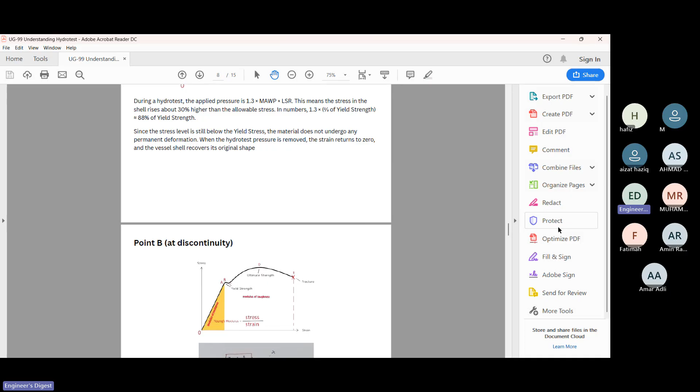Okay, hari ini tajuk kita adalah Hydrotest. Tapi sebelum kita pergi kepada Hydrotest, saya akan go through sedikit tentang apa yang kita dah pernah cover sebelum ni, konsep-konsep dalam pressure vessel ataupun ASME UG yang kita kena faham sedikit dahulu. Kita kena faham beberapa konsep ni walaupun kita dah pernah go through, tapi kita go through sekali lagi, tengok sama ada pemahaman kita dah 100% ke belum.

Satu, pemahaman tentang allowable stress. Ini kita kena betul-betul faham. Semuanya datang daripada stress strain diagram. Stress strain diagram ini adalah untuk material. Any material akan ada stress strain diagram mereka sendiri. Yang saya tunjuk ni adalah typical stress strain diagram untuk carbon steel.

Sekarang kita kena faham, apabila a certain material kita introduce stress, dia akan strain, maksudnya dia akan elongate daripada kosong pada point A. Point A ini apa? Point A adalah dia punya yield strength. Ini penting, pemahaman ini sangat penting. Sebab apa? Kalau stress yang kita apply tidak sampai kepada point A, maka kita akan tahu material ini akan go back to the original shape, dia akan kembali balik kepada kosong, therefore strain pun akan kembali kepada original strain.

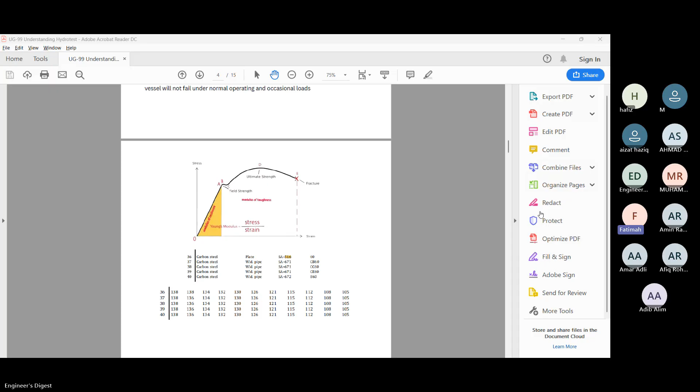Okay, semua dah masuk. Okay, sangat penting.

Tetapi kalau carbon steel material ini kita apply stress sangat tinggi, lebih daripada A, lebih daripada yield, dia akan go to the region which we call plastic deformation. When it goes to plastic deformation, kita kata dia dah permanently deformed. It means that if we remove the stress, it will not go back to the original shape. Why is this important? Today's understanding of hydrotest has something to do with applying stress beyond yield strength for the point that is at discontinuity, we'll talk about that further. But understand this: 0 to A, whatever stress below A is okay, when we remove the stress it will go back. If it goes beyond point B, it will plastically deform, it will not go back to the original shape.

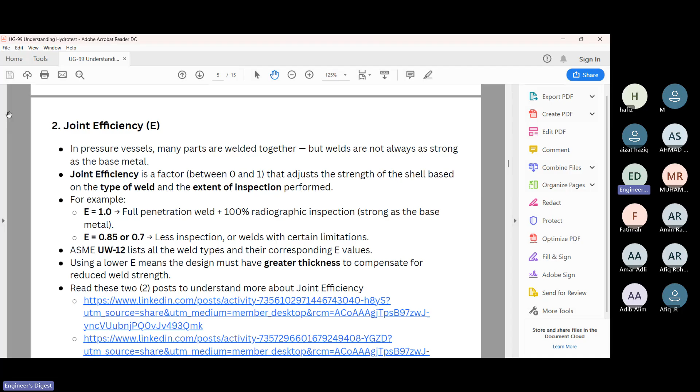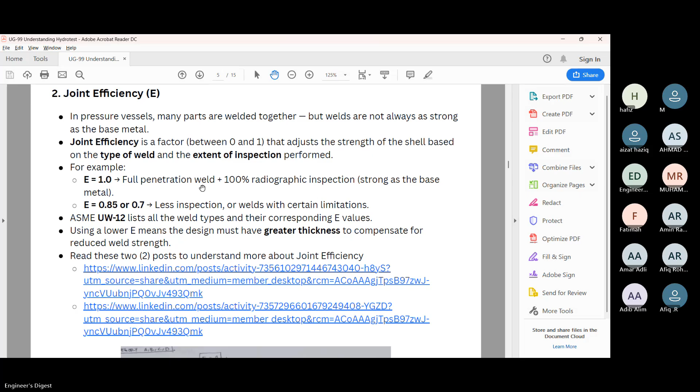Okay, so we will build upon this. Joint efficiency - this one we have covered in the last class. We can say that joint efficiency can be considered as 1. E is equal 1 when we have full penetration and 100% radiographic inspection. E is the joint efficiency. For any plate that we roll, then put a long seam, we will weld. That weldment has efficiency - we can say efficiency is 100% if it's full penetration and 100% radiographic inspection.

If you look at this figure, there are only 3 types. You can consider E equals 1 for these. Other than this three type of weldment, we cannot consider E equal 1. This one is both side groove weld joint, full penetration, considered full penetration. This also considered full penetration, although this is one side, and we put a backing strip, but the backing strip must be temporary. If it's not temporary, we cannot consider E equals to 1. The other one is one side also, but we put a root with TIG welding. Only in these three cases will we have E equal 1, other than this, E is not 1.

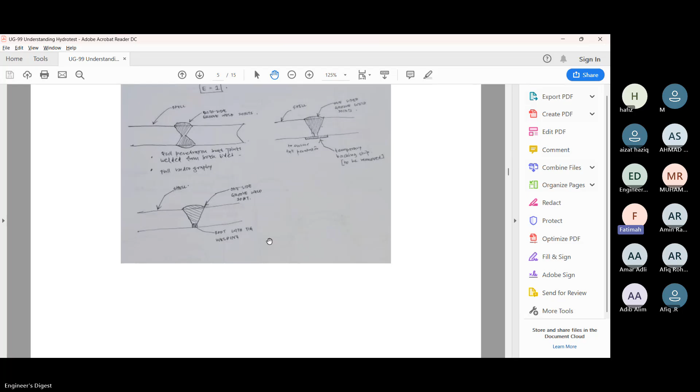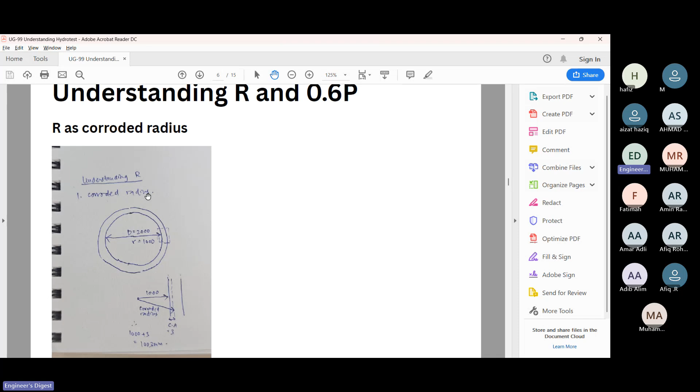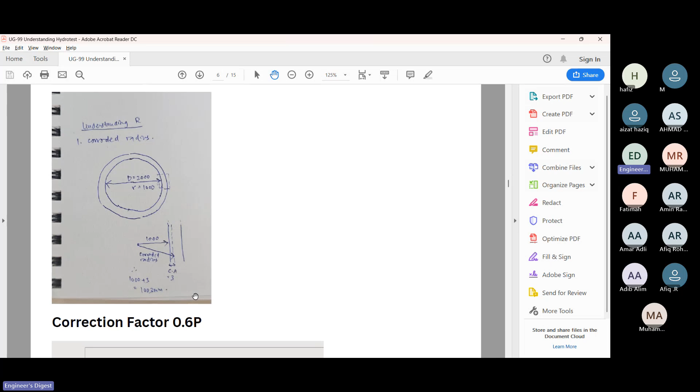Okay, understand this also. When we calculate shell thickness calculation using UG-27, later we'll see at the calculation, understand that R in the calculation always refers to corroded condition. It means that this is your shell. D is 2000, R is 1000, but corroded condition for R is not 1000. Look at this one, it needs to consider the corrosion allowance. Because up until here, it is considering corrosion allowance, so at corroded condition you need to add the corrosion allowance of 3 mm. Therefore your R is always 1003 mm after considering the corrosion allowance. This is at corroded condition.

Okay, understanding the correction factor 0.6P. In our calculation there is this 0.6P. What is this 0.6P? 0.6P is the correction factor. ASME has provided this correction factor 0.6P. Why do we have 0.6P? Because if we use the normal equation, the equation that we studied in university, right, which is equation number 1...

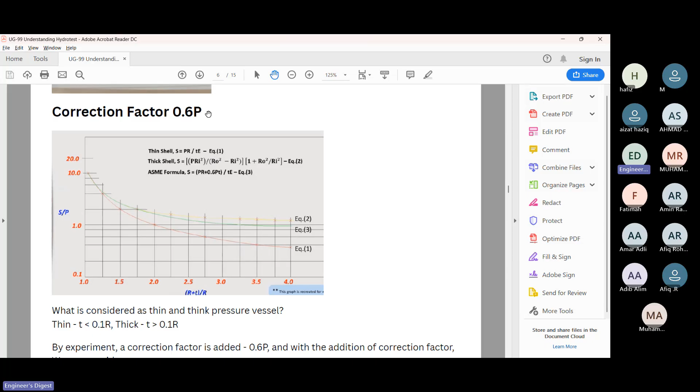Between equation 1 and equation 2, once we add this correction factor 0.6p by ASME, the deviation between equation 3 and 2, or for the thicker vessel, becomes very small. That's why ASME adds 0.6p. So when you open the ASME UG code, you will always see this 0.6p. Understand that this is from experiment, and this is a correction factor. That's why you have this 0.6p.

Now, moving on to our main topic today, we want to understand what is the reason of doing hydrotest. The typical reason of doing hydrotest is to check for leaks. When we apply the pressure, we want to see there is no leak at the weldment or at the flange joint. This is typically what we want to see, no leaking.

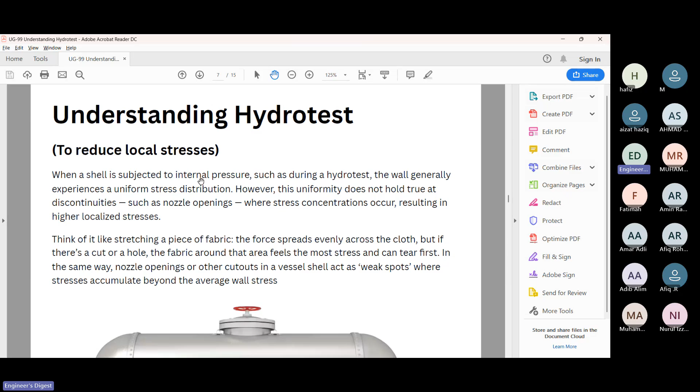But the real reason we do hydrotest is we want to reduce the local stress. And this is mainly discussed in Division 2, not mainly discussed in Division 1. So Division 2 explains the real reason why we do hydrotest, which is today what we want to understand.

So you see this is the typical pressure vessel, horizontal with the saddle. This is your shell, and your shell has thickness based on calculation. But you can see there is a nozzle here, and there is an opening here, and this opening, when there is an opening, you have what you call a discontinuity. Without this, it would be continuous. But with the opening, you have discontinuity.

And discontinuity, you have a higher stress. This stress is uniform. Stress along this line is uniform. But if we have a discontinuity, we have a higher stress here.

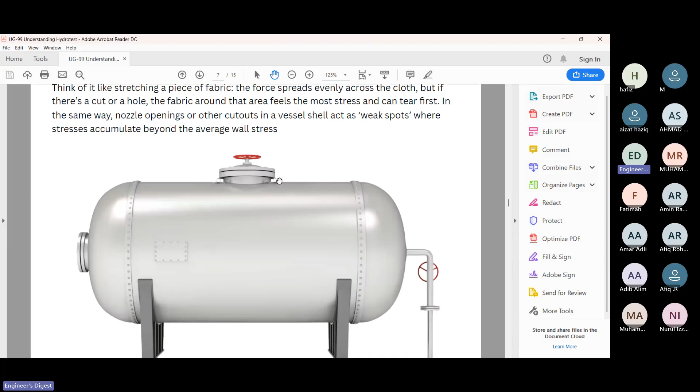So it's the same concept here. There's a discontinuity here, and there is a higher stress here, higher concentration of stress here. So the reason you want to do hydrotest is you want to reduce this local stress here at the discontinuity, at the nozzle or any other part of discontinuity. So far okay? So far can you understand?

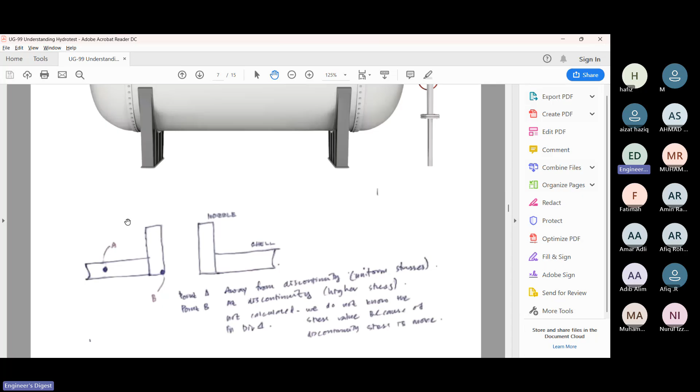This is the nozzle part, for example the nozzle part. You have point A, you have point B. Point A being here, away from the discontinuity. Point B is exactly at the discontinuity. So point B is having a higher stress. Point A is having a uniform stress. B is higher stress.

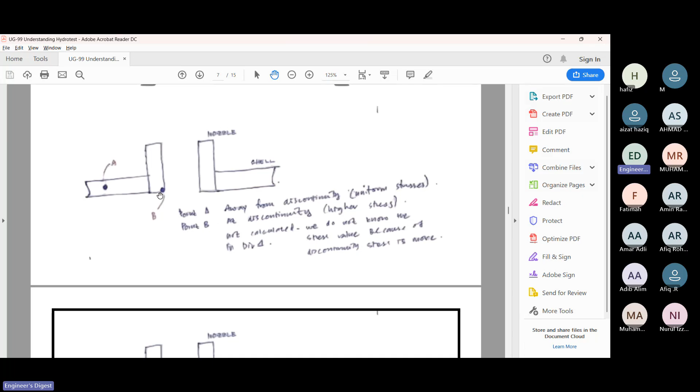At discontinuity, we have a very high stress here. So imagine point A. Point A, when we apply hydrotest pressure, internal hydrotest pressure, it will go to 1.3 of MAWP. Then when you remove the pressure, it will go back to 0.

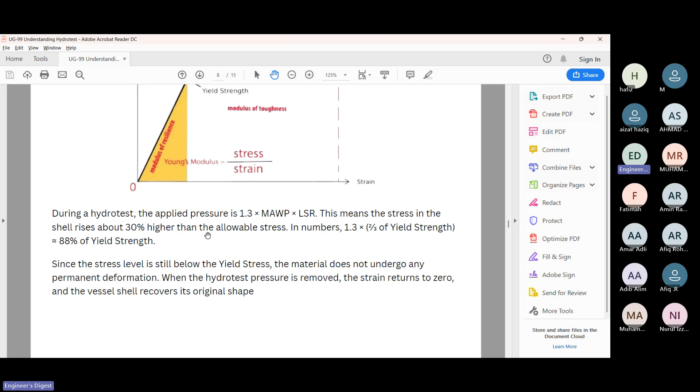This is the formula. We'll go a bit into detail on this formula later. Now imagine at point B. This is understandable. During a hydrotest, the applied pressure is 1.3 times MAWP times LSR. I will explain what is MAWP and also what is LSR. This means the stress in the shell rises about 30% higher than allowable stress.

Basically, 1.3 is above the allowable stress, and this is around 88% of the yield strength. Yield strength is here at point A. It will be around here. Because it does not go beyond A, it's not at B. When we remove the stress, it will go back to the original shape.

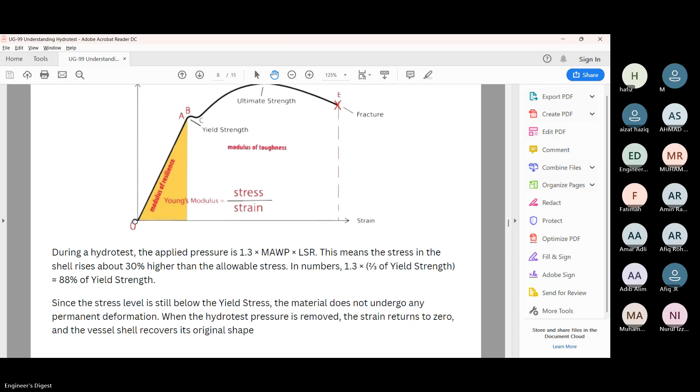But different story at point B. Point B, to begin with, you already have a very high stress because this is discontinuity. So when you apply 1.3 times MAWP, you will go beyond A, because originally you're not at 0 also. Originally you are somewhere here because of the higher stress. So when you apply hydrotest pressure, you will go beyond A, you will go to B, and this point B will be permanently deformed.

Then when you remove the stress, remove the hydrotest pressure, it will not follow this path. It will follow a new path here, and at zero strain, you will have a compressive point here. So always point B will be having a residual compressive stress.

So we can ask, if it's permanently deformed, can we see that it is permanently deformed after the hydrotest? It is not permanently deformed after hydrotest because this point is very small. Point B is very small, and the other points, which are not having this higher stress to begin with, not at discontinuity, will push this point B back to its original shape. So point B will go to the original shape, but it's having a compressive point here at minus.

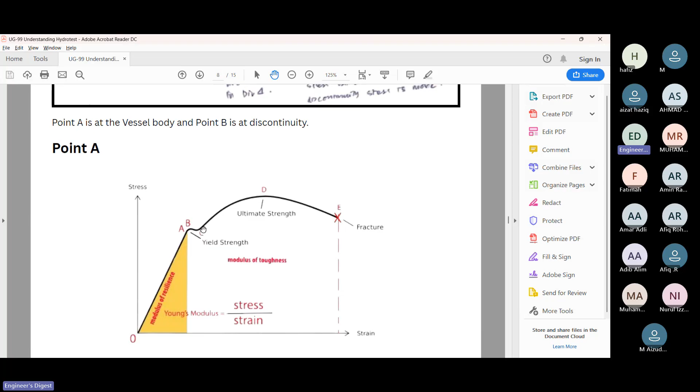Okay, so how do we reduce this point B stress? We apply hydrotest pressure. It will go higher than A, and it will plastically deform. When we remove the stress, it will follow a different path, not 0 to A. It will follow Q to S1.

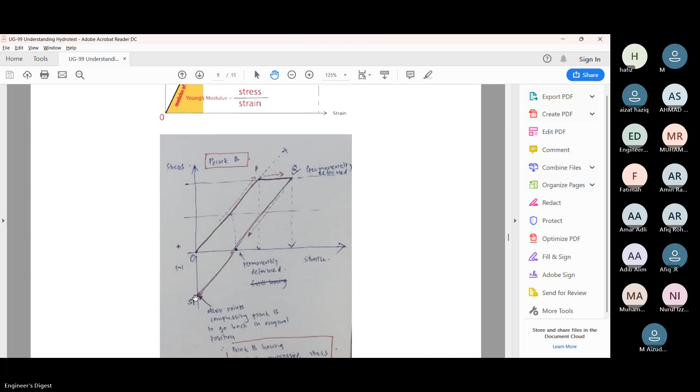This is the new path for point B. So later, if there is stress inside the vessel, it will not start from higher stress because we have tamed the point B, we have tamed it by hydrotest. Now it will start from S1, going up, then going down. This is the new line for point B.

So this is actually the reason for hydrotest, beside having to check the leak. You need to remember hydrotest is the answer to reduce local stress. Where is local stress? Not here, local stress is here at B. What is B? B is at discontinuity.

Why do we have an issue with B? B is having higher stress to begin with. We haven't started anything, but it's already higher stress here because this is discontinuity. This word is very important, discontinuity. Discontinuity means higher stress. So how do we tame this higher stress?

We do hydrotest, that's how we tame point B. When we do hydrotest, it will permanently deform. When we remove it, it will go to a different line, not 0 to A, it will go from Q to S1, and it is having a negative compressing stress. So later, when we have higher pressure inside the vessel, it will start from S1, go up and go down. This is the new path for it, not from here, because if it's from here, it will not start from 0, it will start from something here, because higher stress is already there.

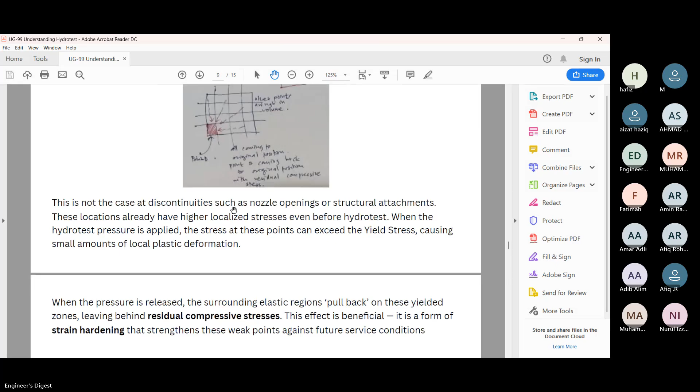Okay? Boleh faham? Faham. Okay Chun, this is the reason for hydrotest. Alright, try to understand, okay.

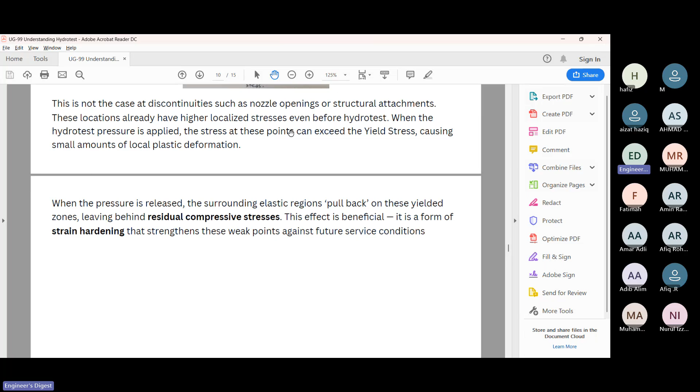When the hydrotest pressure is applied, the stress at this point, point B, can exceed the yield stress, causing a small amount of local plastic deformation. When the pressure is released, the surrounding elastic region, say all this is point A, will pull back on this yielded zone, leaving behind a residual compressive stress at point B.

This effect is beneficial, it is a form of strain hardening, that strengthens this weak point against future service conditions. So point B now is strain hardened, we have strain hardened point B. This is the whole reason for hydrotest, the main reason.

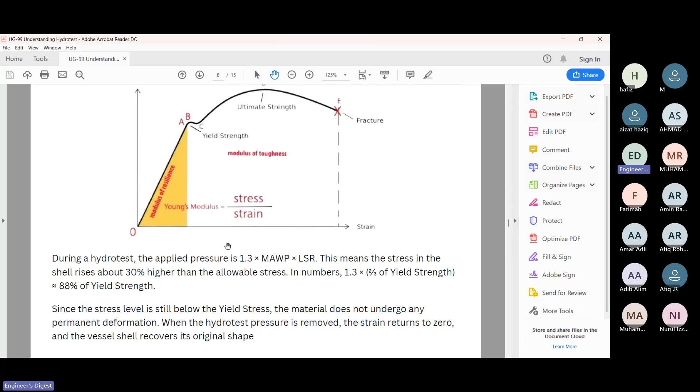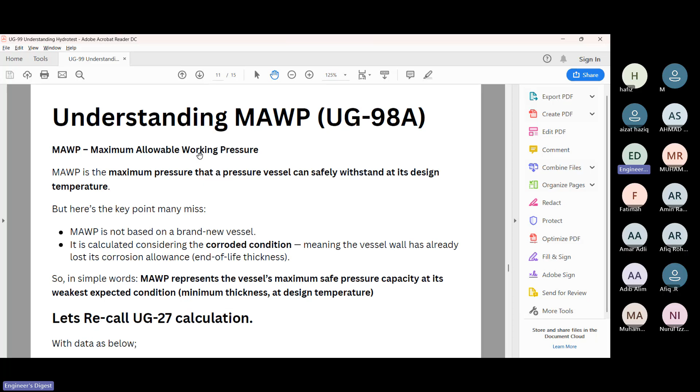Now we want to understand MAWP UG-98A. What is MAWP? Maximum allowable working pressure. The secret to understanding MAWP is actually at the W, working. In operation, you need to consider 2 things: one is corroded condition, that's why when we calculate we always think of corroded condition, and also we always think of static pressure. Then we will go further.

In simple words, MAWP represents the vessel's maximum safe pressure capacity at its weakest expected condition, meaning end of life thickness. That means we do not take into consideration the corrosion allowance.

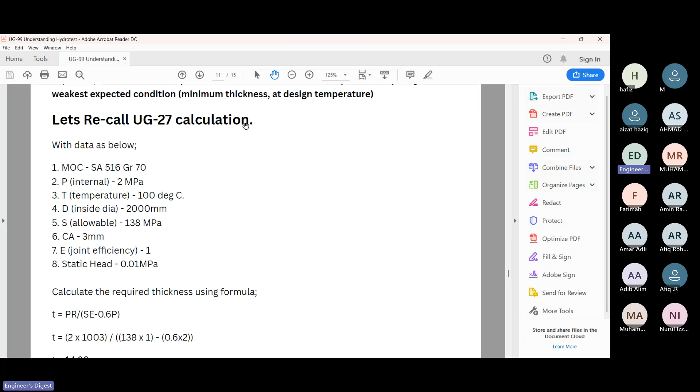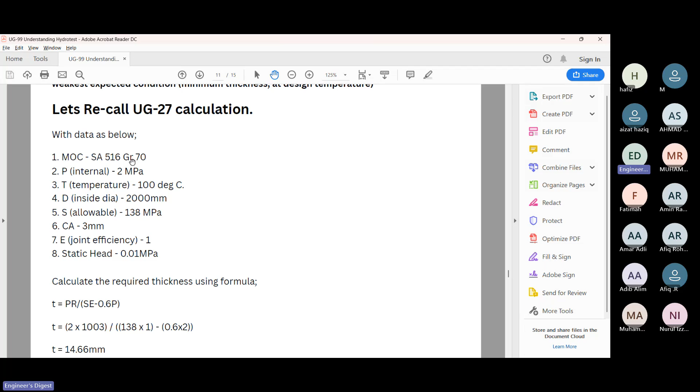Alright, try to do this. If you have a pen and pencil, try to do this. We want to try again the UG-27 calculation. This is your data: SA-516 grade 70. Understand that 516 is carbon steel plate, and 70 means 70,000 psi ultimate strength for this plate. You have internal pressure of 2 megapascal, temperature 100, inside diameter 2000.

Understand this: when you have an inside diameter of 2000, your radius is 1000, right? But 1000 is not the corroded radius, so later in the calculation you need to take into consideration the corroded condition. S is allowable stress, which is 138 MPa. Okay, let's go here.

Item number 5, what is allowable stress? Go back to here, 0 to A. A is the point when you have yield strength. Beyond A, you have a plastic region. Up until A is elastic, go beyond A to B, this is plastic.

So you cannot have stress in normal condition at A, you don't want to apply stress at A, so you want to apply stress below A. What is below A? Below A is 2/3 times this yield strength. This is 1/3, this is 2/3, this is 3/3. So 2/3 is somewhere here, okay, this is your allowable stress.

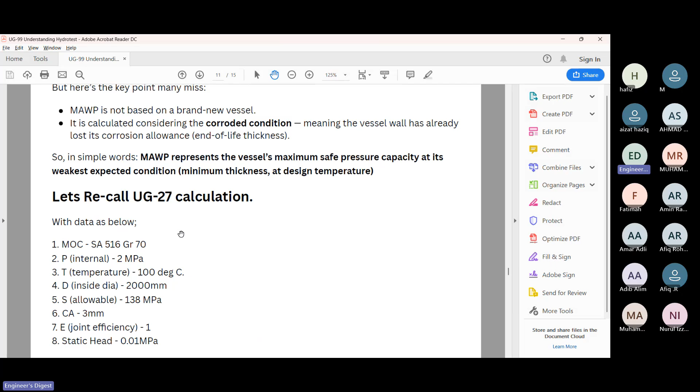So the point here is 138 MPa. That's why we put here as allowable, this one, allowable.

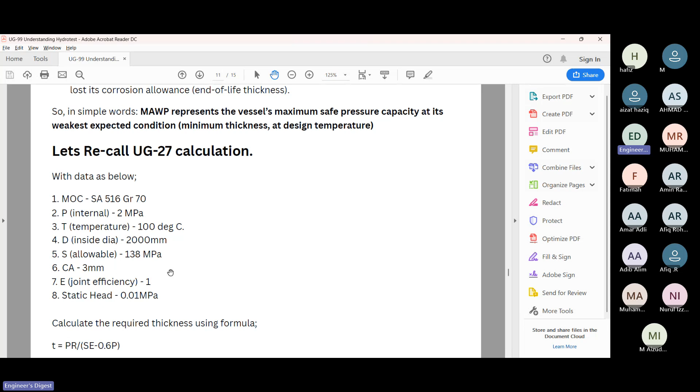Numbers. Okay, that's why we have an allowable 138 MPa. Why do we put here CA as 3 mm? For you to understand that in calculation, you need to put the corroded condition for the radius. That's why you will see that this R is taken as 1003.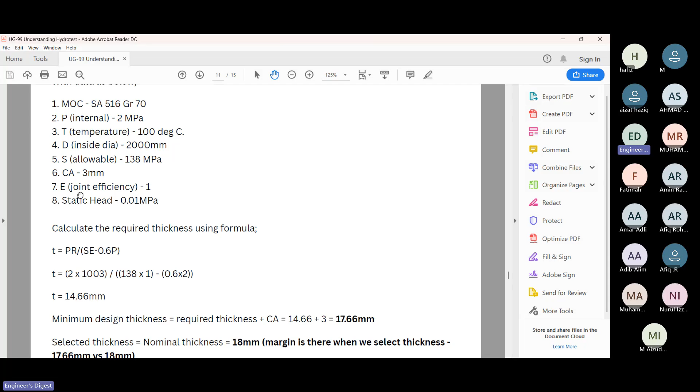Okay, corroded condition. Okay, E is the joint efficiency equals to 1. What does it mean by 1? That's why we try to explain this one.

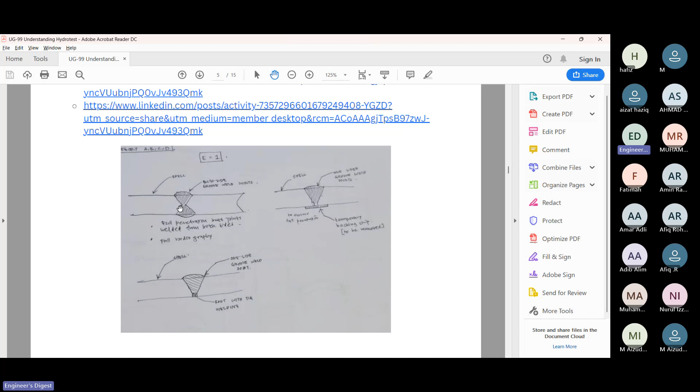Kenapa kita kata 1? So understand, when we say E is 1, it's either one of these three conditions for weld joint only. Both side groove weld, full penetration, or if one side with a temporary backing strip to be removed afterwards,

or one side with a root using TIG welding. This is what you mean by E equals to 1. Other than these three, E is not 1. E is something else, 0.85, something else.

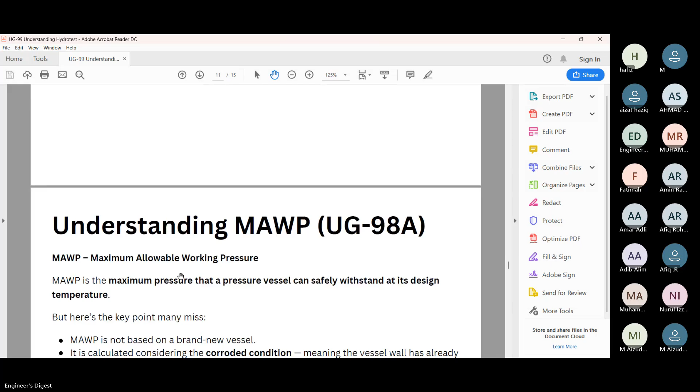Okay, so now we calculate. You try to calculate this if you can. Try to follow along. This note is given to you, so you can print it and put your own notes here. Okay, so T is PR over SE minus 0.6P.

Where do we get this calculation? We get this calculation from UG-27. Earlier this month we have gone through this UG-27. So P is 2, 2 MPa.

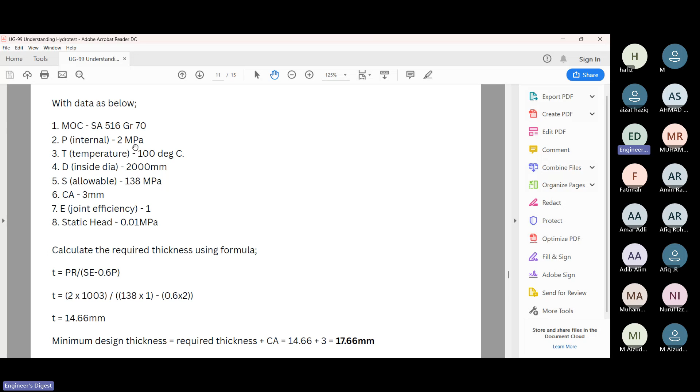Our calculation is using megapascal and mm. This is your unit, megapascal and mm. So it's 2 times 1003 over 138 allowable, times E is 1, minus 0.6 is the correction factor times 2. So you will get T equals 14.66 mm. This is your required thickness.

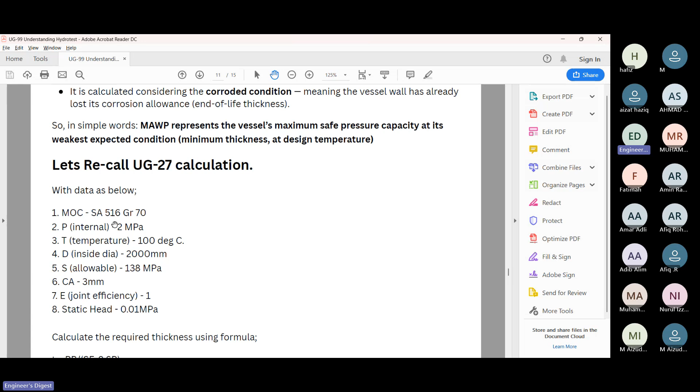Okay, your required thickness is 14.66 mm as per the internal pressure of 2 megapascal. Okay, but now we want to understand what is MAWP. Okay, this 14.66 mm thickness corresponds to the internal pressure of 2 MPa.

Minimum design thickness is your required thickness plus the corrosion allowance. So your required thickness as per calculation is 14.66 mm. Now you want to add the corrosion allowance of 3. Now if you add, you become 17.66 mm.

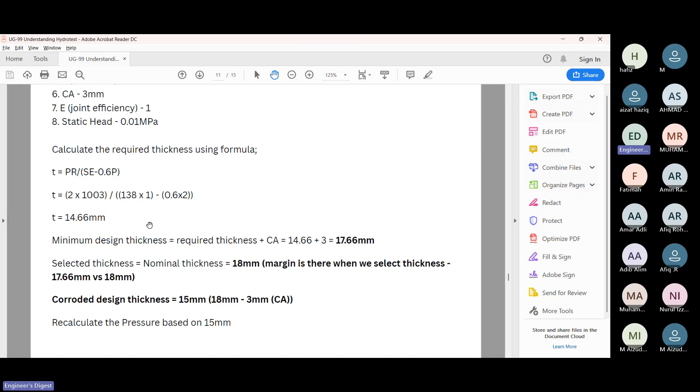Okay, once you have the minimum design thickness, you want to select the plate from the manufacturer. You want to select this SA 516 Grade 70. Then you go to the manufacturer, and when you tell them you want a thickness of 17.66 mm, they cannot give you this 17.66 mm because this is calculated.

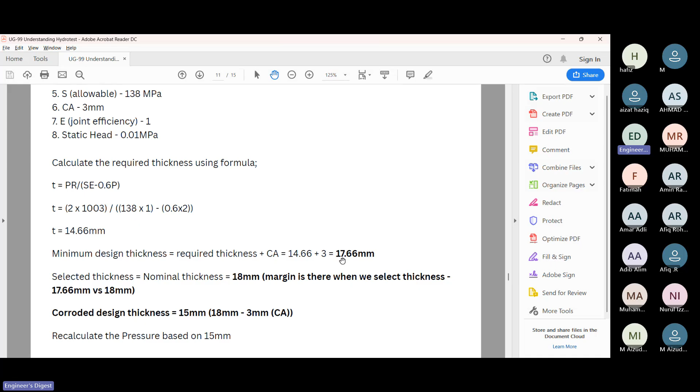What they have is higher than this, 18, 19, 20, something like that. So what they have is 18 mm. So we select the higher. So you select 18 mm. Okay. When you select this 18 mm, your corroded design thickness becomes 18 minus 3 corrosion allowance. Your corroded design thickness is 15 mm.

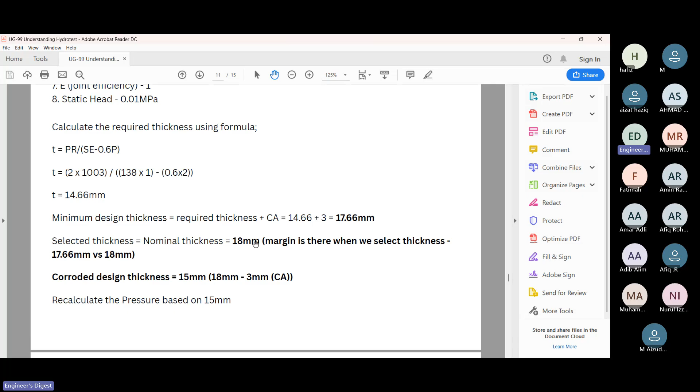Your calculated thickness is T equals 14.66 mm. But now because you select a nominal thickness higher, 18 mm, when you minus the corrosion allowance, you have 15 mm. So if you recalculate using 15 mm, this is your formula, P equals SET over R plus 0.6T. If you calculate this P according to 15 mm, you'll get 2.045 megapascal.

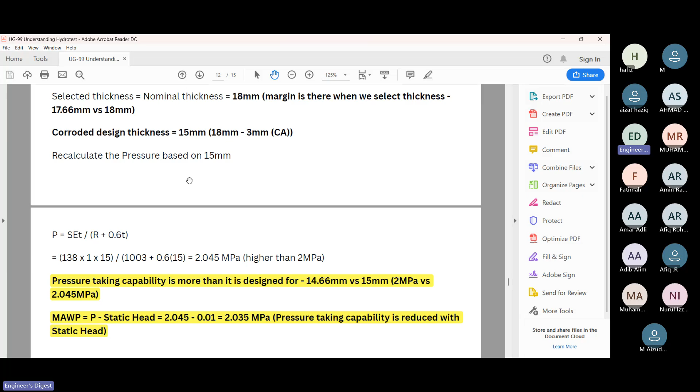It's higher because the design thickness 14.66 corresponds to 2 MPa. But now you have 15. You have a higher value, 2.045 MPa. So it's higher than that, okay. So your pressure taking capability is higher now because you are using 15 mm.

Okay, so 2.045 MPa, is this your MAWP? This is not your MAWP. Okay, remember, MAWP, the secret is at W. W is working pressure. So working pressure needs to consider two points. One is static head, the other one is corroded condition. So 2.045 MPa has not considered static head yet.

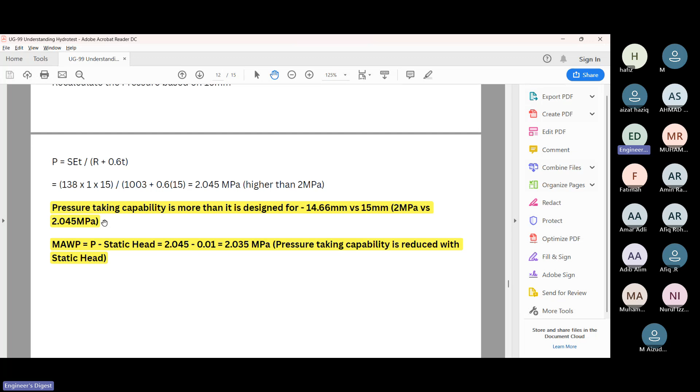Okay, now you want to consider static head. So this one I put here. Static head is 0.01 MPa. So whatever you get, 2.045, you need to minus 0.01. This is your MAWP now.

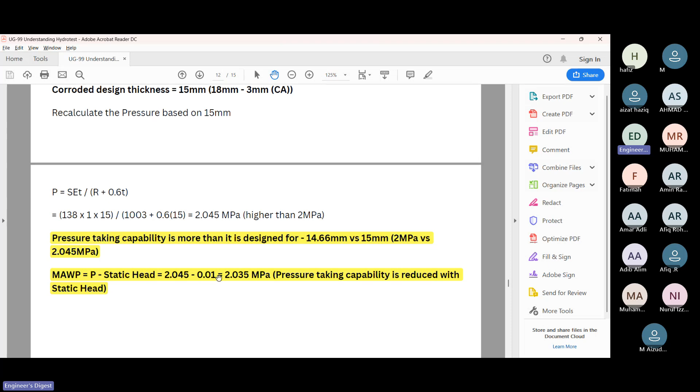Okay, if the static head is more—let's say your vertical vessel is more than 1 meter, like 3 meters—then since the static head is higher, you need to minus higher. Okay, so this is MAWP.

Alright, so this is the important point. The word 'working' is important. This W means that MAWP is not just theoretical, it's the maximum pressure the vessel can safely work in service.

So consider static head, consider corroded condition. These two are important. Okay, so now you also might have heard of MAP. What is maximum allowable pressure? There is W here, there is no W here. So this is not in working condition.

It means that you will not take into account the static head and you will not take into account the corroded condition. When you calculate earlier, the selected thickness is 18 mm.

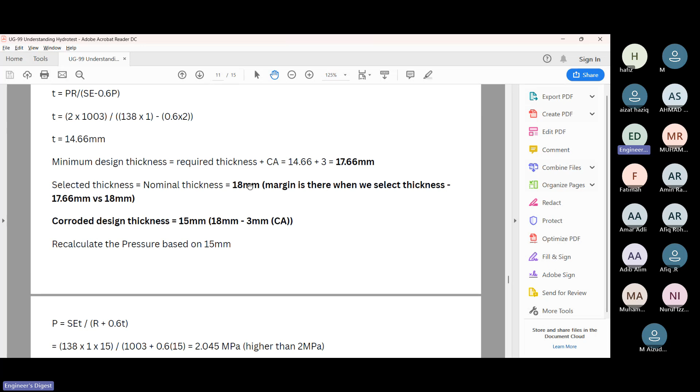So you will base on 18 mm. Use back the formula: P equals SE T over R plus 0.6T. T becomes 18 mm. When you recalculate, you get 2.45 megapascal. So you get higher.

Okay, but this is not working condition. Okay, so far okay.

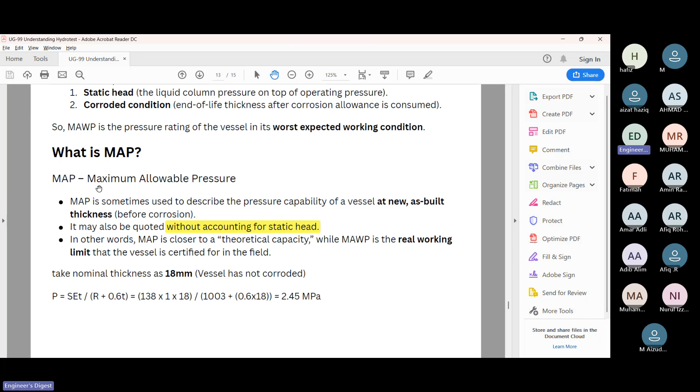Sir, can you repeat back the MAP? Okay, alright. So MAP is maximum allowable pressure. The difference between MAWP and MAP is MAWP has the W. W is working, meaning that we need to consider two things: static head and corroded condition.

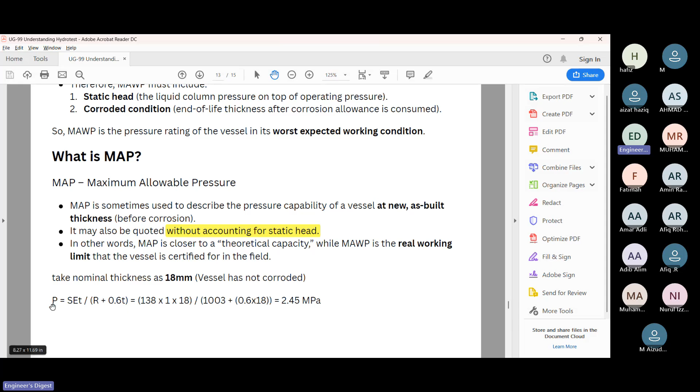Okay, so when you recalculate P using this formula, for the thickness T, you want to take the nominal thickness—the one that you buy from the manufacturer. If you're buying 18 mm, take 18 mm into this calculation and you'll get 2.45 MPa. This is your maximum allowable pressure, but this is not in real working condition.

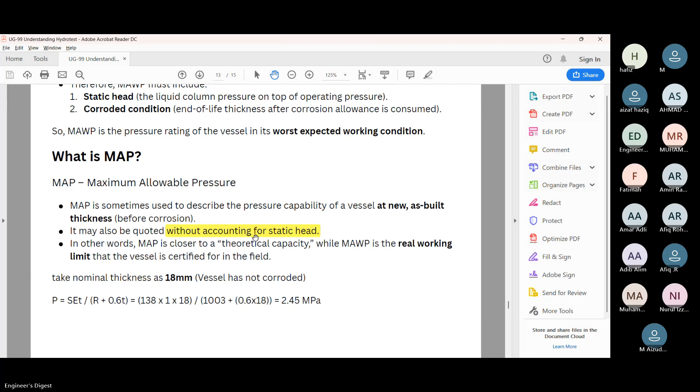Okay, is that okay? Understand? Alright, thank you. Okay, thank you. Okay.

Okay, now we want to understand what is hydrotest requirement. Now we want to understand this. After all of that, now we want to understand hydrotest requirement. Okay, what is hydrotest requirement? UG-99, ASME 8, Division 1, UG-99.

Okay, hydrostatic test shall be carried out on all pressure vessels after fabrication has been completed and all examination has been performed. NDE, whatever it is, already completed. Now we want to go for hydrotest.

Okay, what is the exception? The exception is if we want to go to pneumatic test. Pneumatic test uses air, hydrotest uses water. But all of the time, if it's permitted, we always want to go for hydrostatic test, because hydrostatic test is safer.

Hydrostatic test—if you have a leak, what will happen is water will come out, so you know there is a leak. But for pneumatic, if there is a leak, it will go like an explosion. Okay.

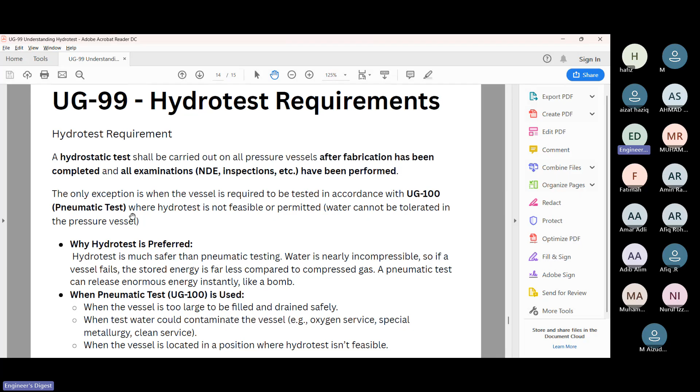So always prefer hydrotest, always. But if this vessel cannot tolerate water—the vessel must be kept very dry always, and it's not feasible to dry the vessel—then we can opt for pneumatic test using UG-100. Okay.

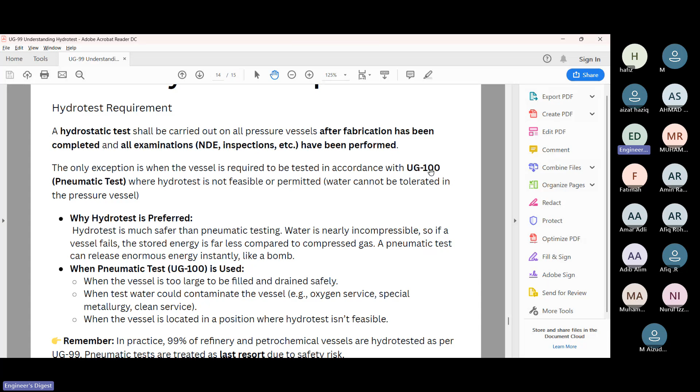Alright, so now this one I put here: hydrotest much safer. Okay, UG-100, this is the condition if we want to use UG-100. But 99% of the time we use hydrotest.

Okay, so now we understand that this is your formula for hydrotest. Minimum—this word minimum is very important—1.3 times MAWP. I've already explained MAWP. So what is this? LSR. LSR is lowest stress ratio. Why is this lowest stress ratio coming into this formula? It's because of one thing only.

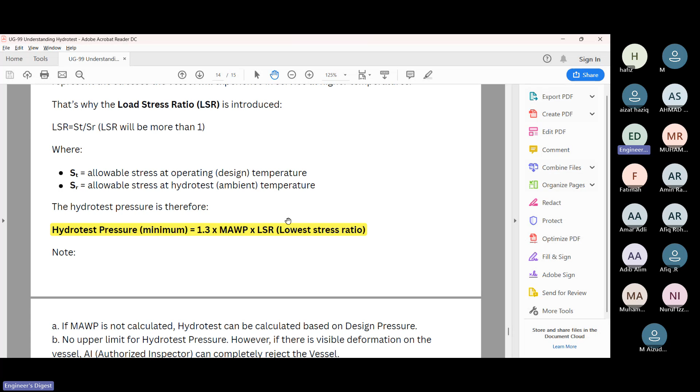Because when you do the hydro test, you are doing it at your workshop or at ambient temperature—maybe 30 degrees Celsius, something like that. But if you put the same pressure vessel under working condition, this temperature will be much higher, maybe 200, maybe 300 degrees Celsius.

So a concern can be: if you are doing the hydro test pressure, is it really representing what is happening at the actual condition at site with the higher temperature? So that is the concern. So to solve that concern, we have LSR, lowest stress ratio.

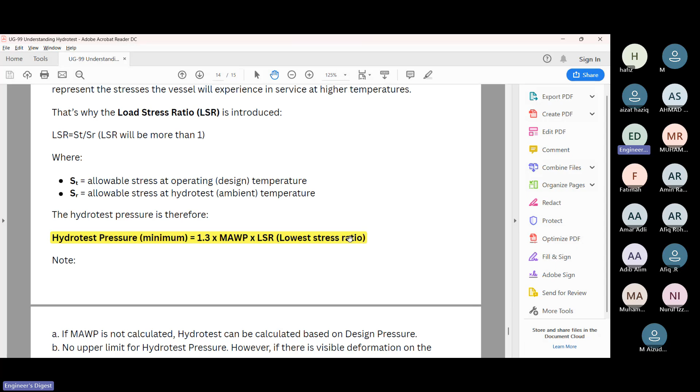So what is this? It's only dividing between the allowable stress at hydro test at ambient, okay, and allowable stress at operating condition. Okay.

Maybe I will show ASME 2D. I will show after this. What do I mean? Okay, I will show now. Hold on, you hold on for one minute. I will open ASME 2.

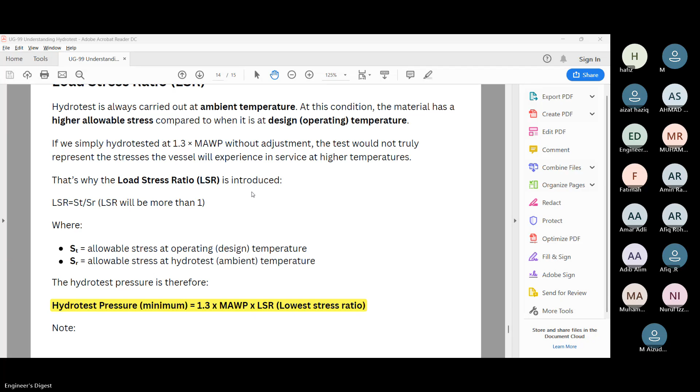Can you see this ASME 2D? Can you see it? Nampak. Okay, this one, alright.

We want to understand LSR. This is your ASME 2D mechanical property, table 1A. If it's table 1A, you can use this for Division 1 calculation. If it's 2A, that is Division 2. So if it's Division 1, always look at table 1A. A means ferrous material, B means non-ferrous.

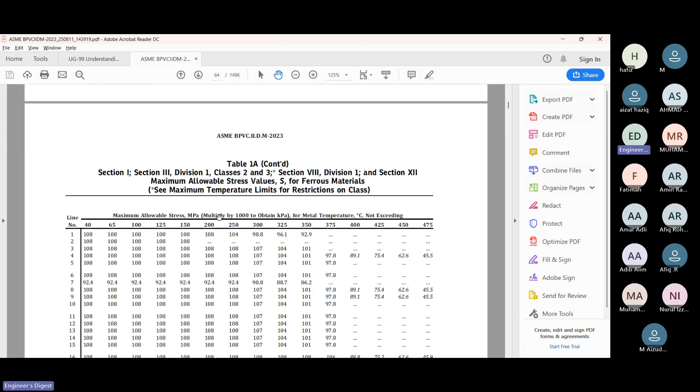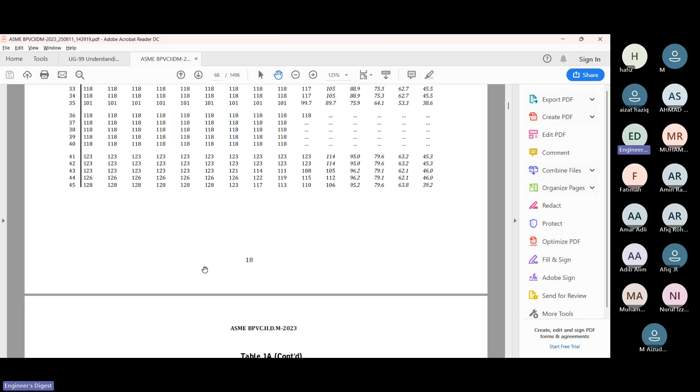We want to see our material just now is 516, 70. So if you look at 516, you can see this is carbon steel plate 516, but this is grade 55. Ours is grade 70, so you need to look further. 516, okay this is 60, 65.

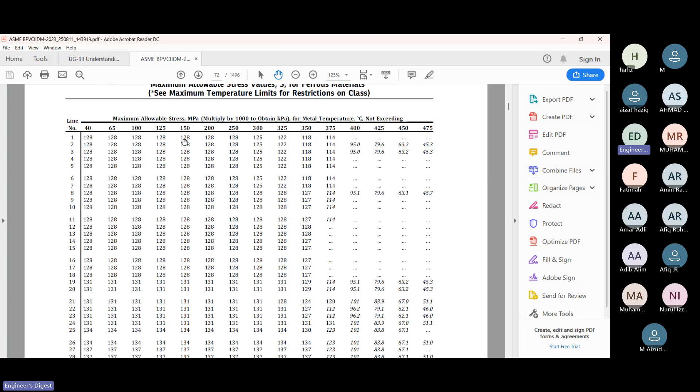Okay, this one, SA 516 grade 70. What is this? This is a carbon steel plate, item number 45. So you look at the third page, 45, SA, okay at 45. You can see at 45, this is the temperature. At 40 degrees Celsius, the allowable is 138.

Same as what we did just now, 138 here. If the pressure vessel is operating at 300, this allowable stress becomes 136. So you can see as the temperature rises, the allowable becomes less. This means that any material subjected to higher temperature, the strength of the material becomes less, so allowable stress also becomes less.

So LSR means at this 138, at this ambient temperature, you want to divide by whatever the operating temperature was. If the operating temperature is 300, you will take 138 divide by 136, so you get the LSR ratio. Now it is representing... that's okay, paham?

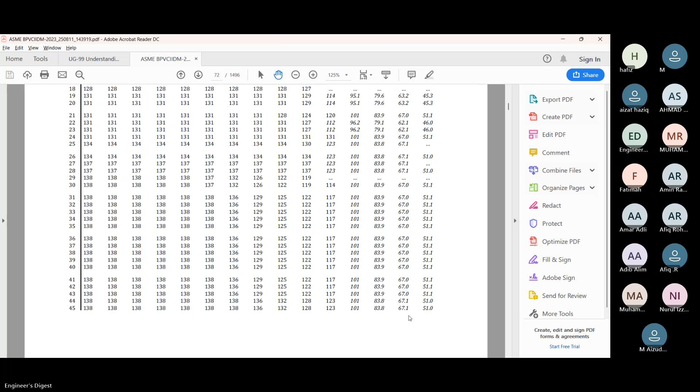So this 1.3, you times MAWP, you times 138 over 136, you get the LSR ratio. Now hydrotest pressure, when you use UG-99B, hydrotest pressure, this figure is actually minimum. 1.3 times MAWP times LSR is the minimum. So based on UG-99B, you cannot have a hydrotest pressure which is lower than this, because this is minimum. The word minimum is important.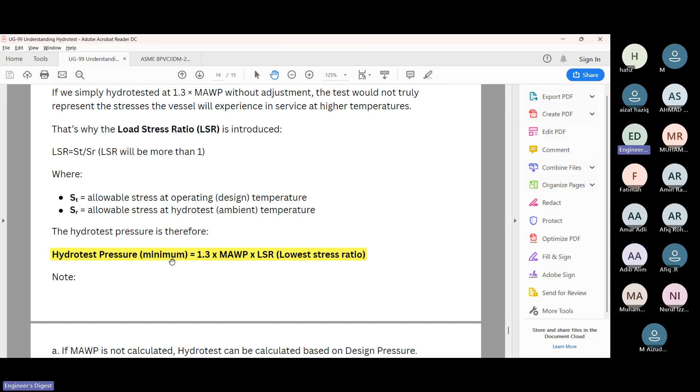Note here, if MAWP is not calculated, you can substitute this MAWP with design pressure. And if this is minimum, what is the maximum? So from code, there is no upper limit for hydrotest pressure, but that doesn't mean you can go way beyond to so much stress.

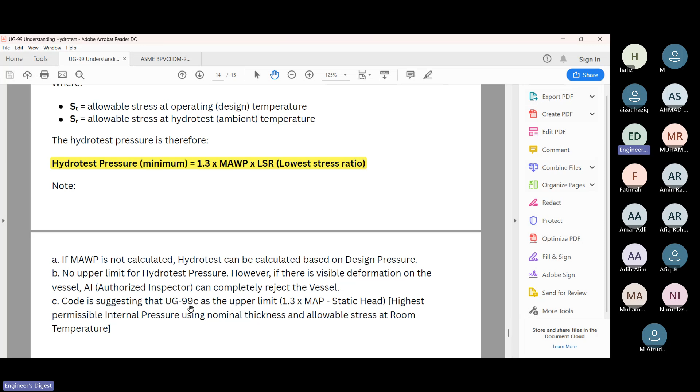Because if there is a visible deformation on your vessel, your vessel can be rejected, and that's the worst case scenario. So although code is not saying what is the maximum you can go, code is suggesting the maximum you can go is UG-99C. What is UG-99C? We have covered MAP. UG-99C is 1.3 times MAP, and then you need to minus the static head. That's your upper limit. So a hydrotest for your vessel can go minimum UG-99B or maximum UG-99C. Is there any question?

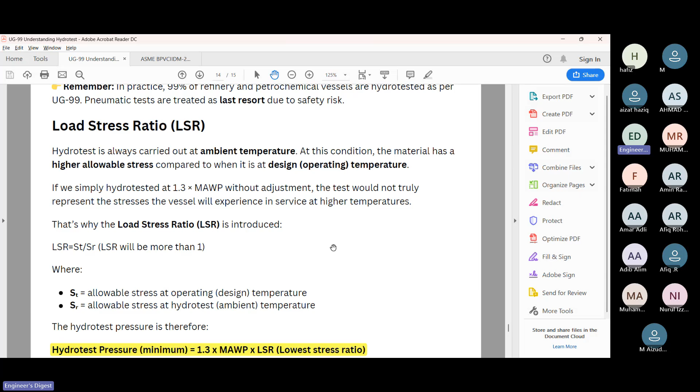But sometimes I face client who want the hydrotest to be done 2 times. Let's say for air cooler fabrication, they want to have the HT for the header box before the tube is inserted into the header box, and the second time is after completed.

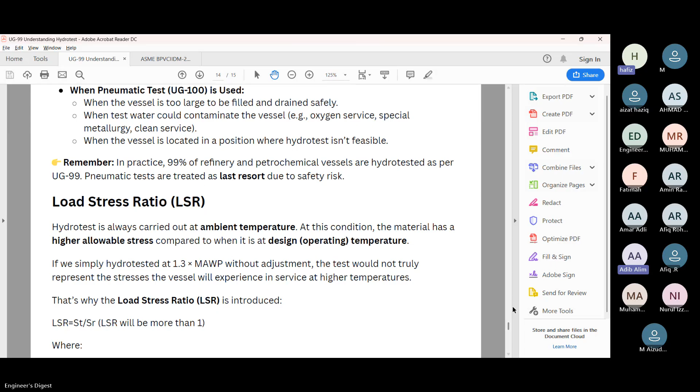Any more questions? I want to ask about the compressive stress earlier - at point B, is it going to be negative? Can you explain?

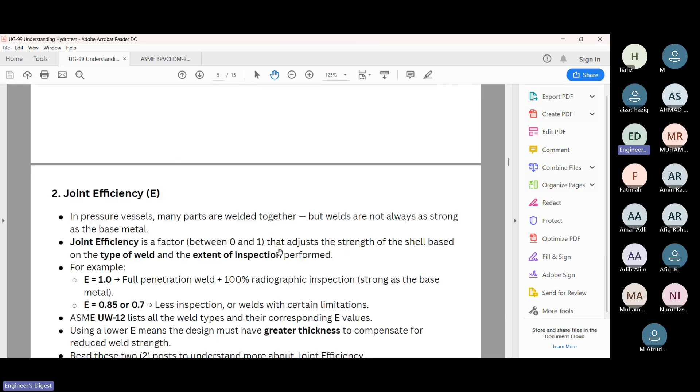Okay, let's go back to this point B. This is at a discontinuity. At a discontinuity, when it starts, it already has a higher stress - we already have higher stress at point B. So it will not start at 0, it will start somewhere above 0 because of the higher stress at the discontinuity.

When we apply 1.3 times MAWP, it will go beyond point A. When it goes beyond A, it will have plastic deformation - think of it like rubber that has been stretched. When it goes back, when we remove the stress up until here, this plastic deformation will be maintained.

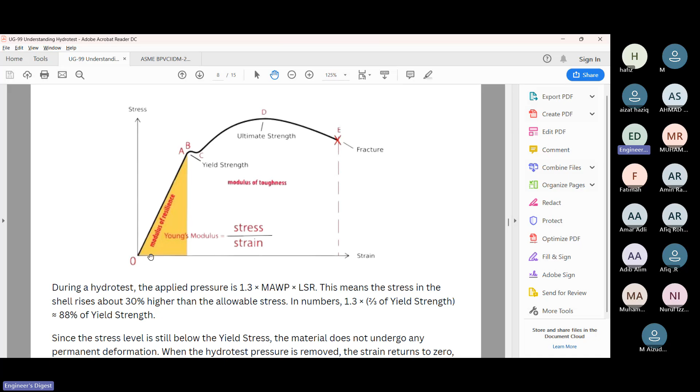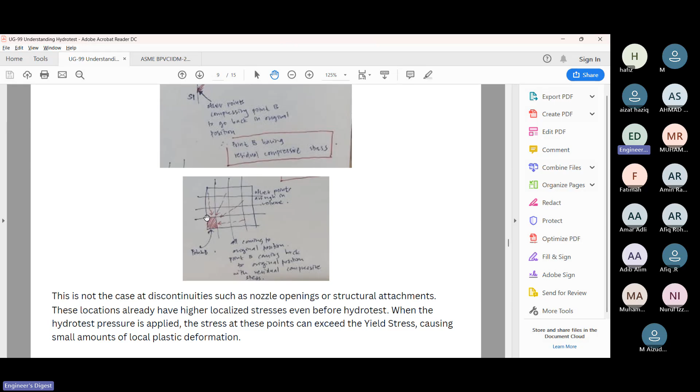This means at point B it will become slightly larger than the others. But point B is a very small point, and the other points above point B don't have a higher stress to begin with - they're like point A. So the many points A will push point B back to its original shape.

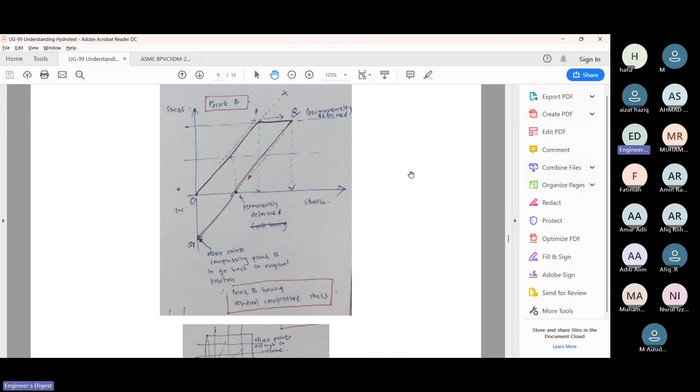Sir, let's say kita hold HT and then pressure drop tapi bukan sebab leak. Berapa tolerance yang kita boleh set? Okay, HT pressure drop but no leaking. Pressure drop without leak. So this could be a temperature factor. Mungkin dia tengah buat tengah hari kan, so panas, so ada pressure drop sikit.

Okay, berapa tolerance, this one I need to check. Boleh tahu, nama ke? Iqbal. Okay Iqbal boleh WhatsApp saya? Okay, then I will check, I cannot answer right now, tak sure. Nanti I will check.

Okay, ada lagi question? Sir, satu lagi. What is the recommended holding time untuk HT? Typically 60 minutes for this. Is it stated in the codes and standard? Let me get back to you on that.

Okay, holding time, siapa? Adib. Adib, okay, holding time. I will get to you, Adib.